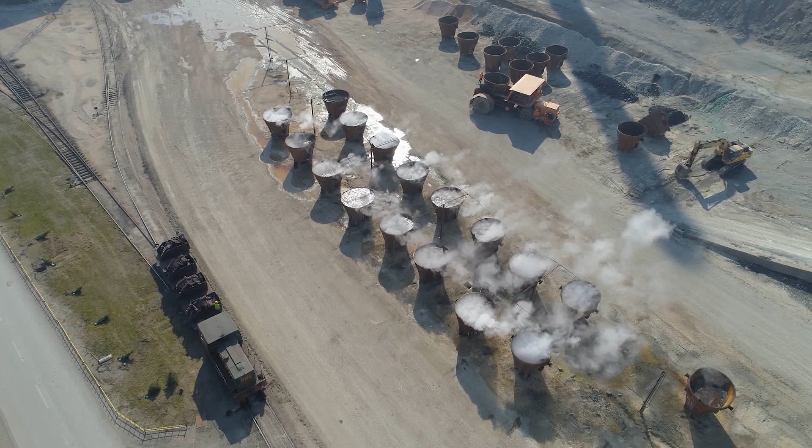Prahovo is connected by about 50 kilometers of road to Vidin in Bulgaria and Calafat in Romania, both of which are important road and rail hubs on European Corridor 4. A 150-kilometer highway also connects it to European Corridor 10, which links Serbia to other European countries.

Prahovo International Port on the Danube is one of the key advantages of the site, as it provides the most efficient transportation to numerous markets.

Elixir Group is the operator of the port of Prahovo, which has 700 meters of operational quay, 7 berths for river vessels, and facilities for receiving and handling all types of cargo from river barges, rail trains, and transport trucks. The current transshipment capacity is about 2 million tons per year.

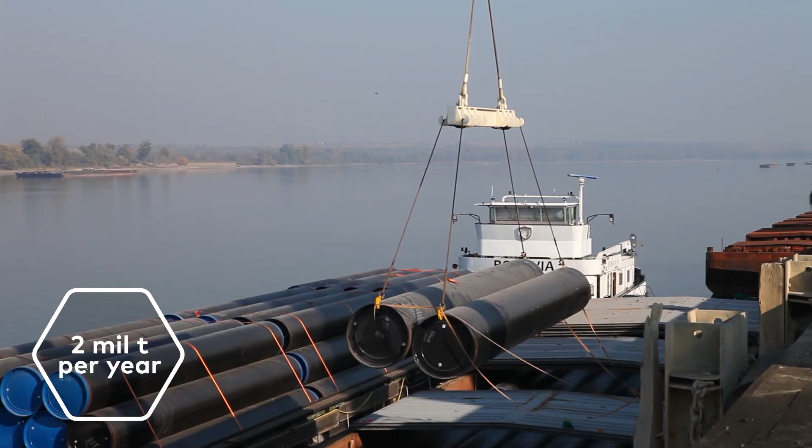The development plan involves expanding the port area, increasing the annual transshipment capacity to 3.5 million tons, and building new closed and open warehouses in the port.

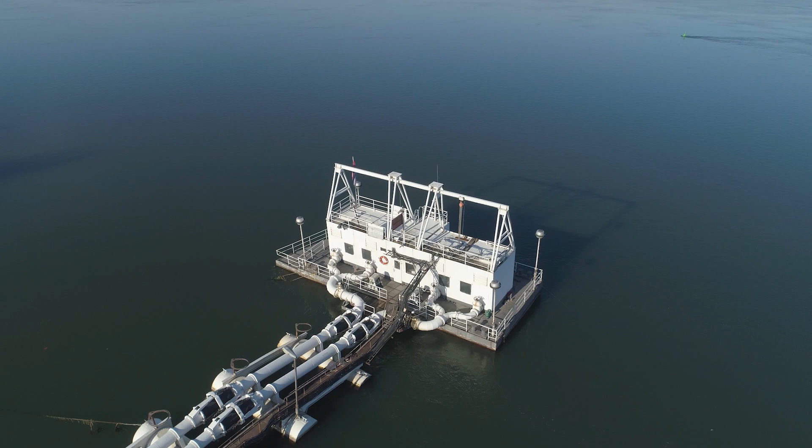Industrial water supply is provided through its own pumping station on the Danube, with a capacity of 4 times 650 cubic meters per hour.

Electrical supply is provided through a dedicated high-voltage transformer station with a total power of 2 times 31.5 megavolt amps. The system has dual power lines and is directly connected to the Đerdap 2 hydroelectric power plant.

Steam supply is through a system of insulated steam lines to each consumer. Current steam production is 55 tons per hour.

The development plan of the industrial complex in Prahovo covers a total area of 300 hectares, of which 115 hectares is intended for construction of an industrial chemical park comprising several technological units.

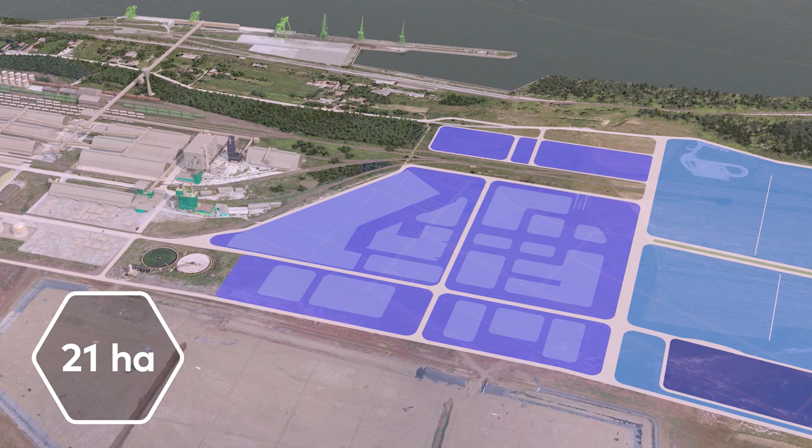The chemical park is intended for building new production facilities for the chemical industry. The industrial park is envisaged for the activities of other branches of industry. The energy island is intended for construction of infrastructure and energy capacity needed for the chemical park.

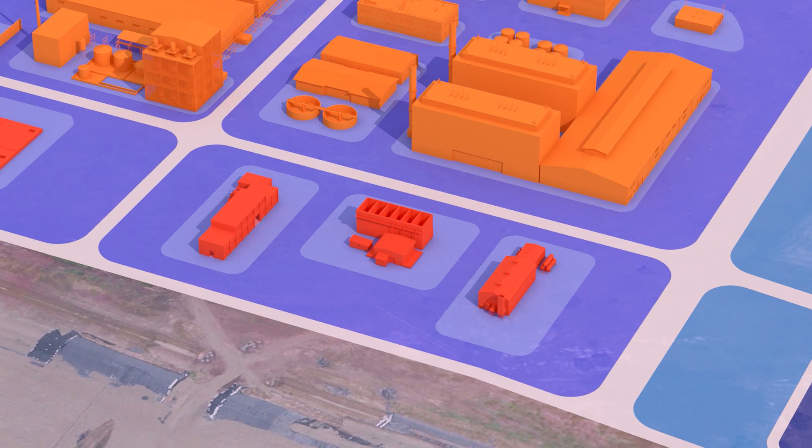Plant for pyrolysis of waste tires. Incineration plant for solid and liquid industrial and non-recyclable waste with utilization of heat energy and new capacity for steam production. In addition, plant for demineralized process water, water cooling towers, compressed air center, warehouse and logistics center with rail and road terminal, central plant for final wastewater treatment after appropriate initial treatment at production sites, central administration building with shared facilities.

Site infrastructure for production plants includes an internal traffic network, underground and above-ground corridors with all necessary installations.

The environment island of 10 hectares, as an important part of the waste management system, is intended for disposal of industrial waste residues from the plants.

Plans are in place for extension and long-term development of a modern storage area for phosphogypsum as a byproduct of phosphoric acid production. The configuration of the site allows for further development of production facilities and expansion of the industrial chemical park.

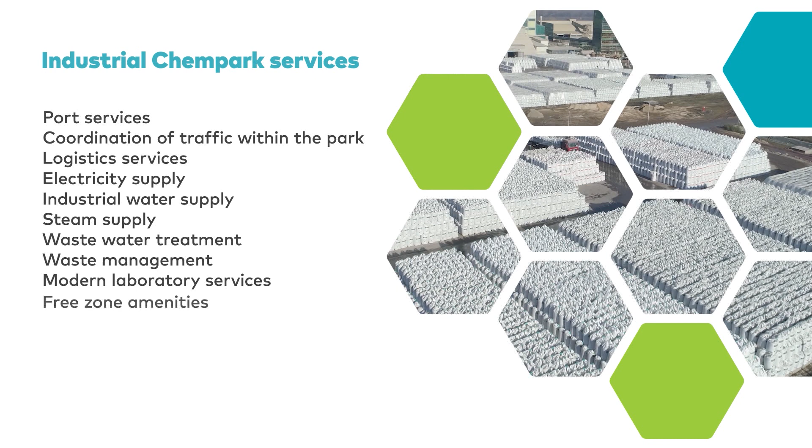The ultimate development goal of Prahovo Industrial Chempark is an effective logistics infrastructure and a complete range of the utilities which operators of developed chemical parks in Europe provide for their clients.

There is a range of advantages and benefits for investors in Prahovo Industrial Chempark: availability of raw materials, access to multiple markets, workforce and education, corporate profit tax, price of electricity, and incentives for foreign investors in Serbia.

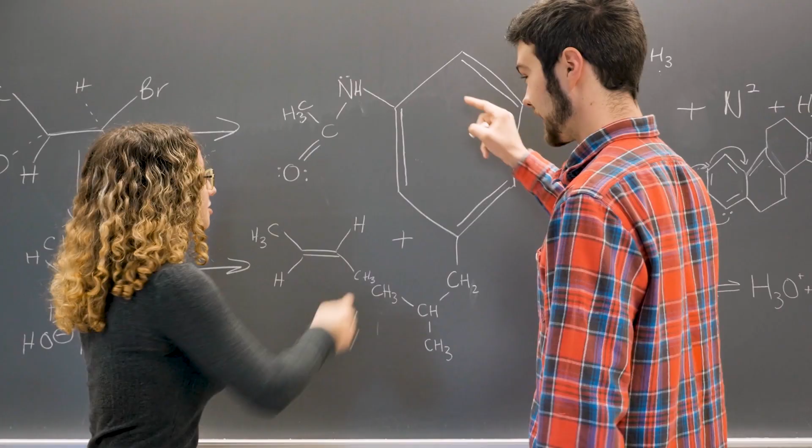The Elixir Group also focuses on the development of human resources through collaboration with all education institutions, scholarships, and setting up an education and training center. HR projects are aimed at motivating young people to seek career development in the chemical industry.

The group also assists employees with housing and relocation. One important HR project is the phased construction of Elixir Garden, a residential commercial development in an attractive location in Negotin. Among its other benefits, this will provide important support for further HR development as well as expansion of the activities of Prahovo Industrial Chempark.

Opportunities ahead.